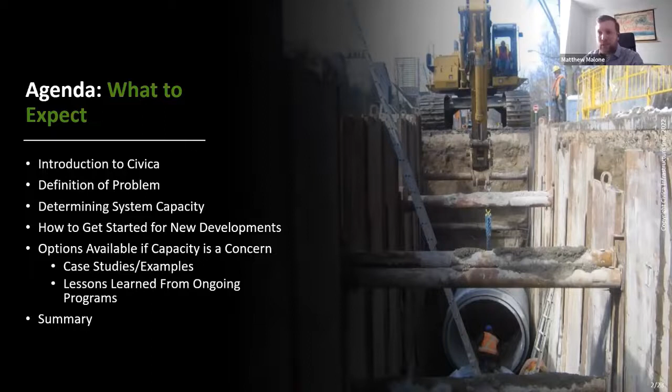So a little bit about Civica. So, Ed, who's on the call, started Civica back in 2012. And so we're going into our 10th year, and really most of our focus is on collection systems.

We do a bit of work on the water side as well, but most of our work is helping municipalities grow and manage capacity in their collection systems, whether that's stormwater or wastewater systems, through the various services that we provide, whether that be field services, going out, performing inspections of assets and flow monitoring, and looking at the system in the field, as well as the consulting side of things.

So a lot of work that we've done in the past is on the modeling side, looking at capacity. We do some water resources work as well, and everything from as small as a sub watershed or an individual asset inspection, going out and CCTVing a pipe, to larger, higher level master plans and studies. So everything from right down into the nitty gritty to those higher level studies.

I'd say Amit did a very good job introducing us, so I think I'll probably just skip this slide because I don't think we could have put it better ourselves. So I'll just dig right into the content and the reason why we're all here today.

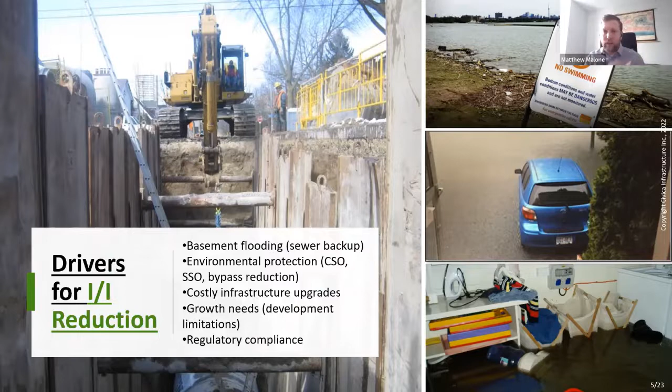And then there's certainly the regulatory compliance. So with the ministry's new CLI ECA regulations, which focus more on consolidated linear infrastructure, it's really looking at the system as a whole and how it functions together. And so that's another driver as to why you want to look at I&I on a system-wide basis.

And so, when we talk about some of the pressures we're experiencing right now, and as we continue to grow, and as we see that there's a large increase in the prices of homes and the amount of growth that's happening around Ontario, we can see that it's happening now, and it's going to continue into the future through all the growth forecasts that we've seen, and the ministry's Places to Grow guidance as well. So there's a lot of growth that's happening, and it's causing a lot of strain on existing wastewater systems.

To add to that is the climate change component; there's certainly a lot of evidence and a lot of research happening that projects larger storms into the future. So how do we accommodate both a growing population and potentially larger storms? Again, focus mostly today on the wastewater system. So how do we make sure that going forward we're able to accommodate that growth while also making our systems more resilient?

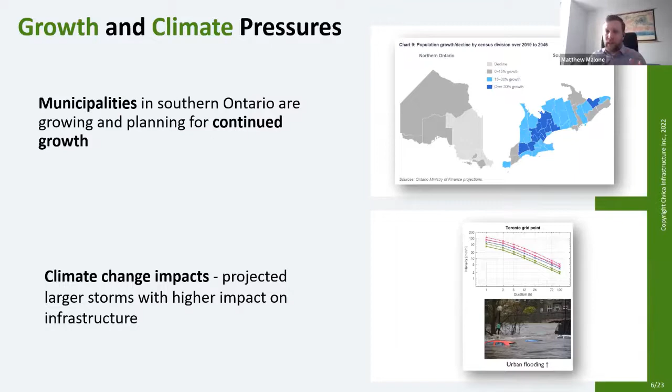This doesn't always lead to issues, but one common problem that we do see, and a lot of focus, in the City of Toronto with their basement flooding studies, is that when the I&I is too high, or wet weather flow is too high, then it does cause issues like basement flooding.

And so really, when we talk to municipalities and we're working with municipalities, there's a lot of conversation around either a lack of capacity in a lot of areas where there is sort of a known issue, or a lack of understanding of the capacity within the system.

So a lot of municipalities are still in the process of collecting that information, whether that's monitoring and modeling, to see where maybe some of those pinch points in the system are, where they may experience capacity constraints in the future. And so how do you accommodate growth in a reasonable and sort of responsible manner, if you're not really sure what the capacity is?

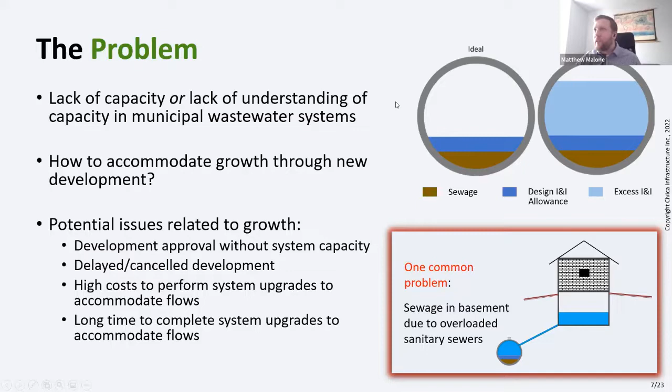So when we talk about determining the capacity of a system, a lot of the time this is something that is assessed as part of these higher level studies, whether that's a master plan or a pollution prevention control plan. And really those happen, let's say, every 5 years or every 3 or 4 years for some that do it more often. But there are tools available to be able to do that more frequently, to get an assessment of the capacity of your system without having to wait for one of these studies to be completed.

So one of our big pushes is to try and make this as live or as near real time as possible. So we have certain tools and systems in place through monitoring and modeling and reporting to municipalities on a very frequent basis, so they can get an understanding of what the capacity actually is in the system. And typically you set this up once, and then it needs to be maintained, but it's a self-perpetuating system that will give you a good understanding of what's going on at a municipality level, let's say.

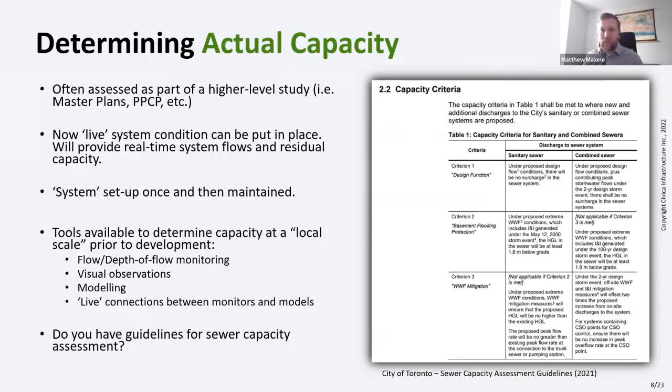So a question, and I'll get to it more towards the end, but essentially if you don't have guidelines, or if you don't have an understanding of how you would put something like this together, it's certainly something that is out there. It's widely available, and if you need help pointing to resources, feel free to reach out, and we can certainly connect you to where you may find something like that.

And so how do you get started? So typically, this is usually how we see it: in terms of growth and new development, when these subdivisions or site plans are being put together, they're then submitted to a municipality, and a capacity assessment, for example, in the City of Toronto is a requirement. So as part of putting in a new infill development or a new subdivision, a capacity assessment is automatically triggered to see if there is capacity in the downstream system to accommodate those flows.

And this is compared against what was there previously. So if it's a 2-story existing building and they're tearing it down and putting in a 20-story, we're putting in the change in flows, but also comparing it against the capacity criteria.

We've talked to a number of municipalities, and typically, when you're taking on this additional analysis, there may be a need to either create a fee to do a review of these site plans or subdivisions, or revise their existing fees so that they have the resources, whether that's to hire somebody internally to do that work, or to hire a consultant outside that can act as your sort of in-house modeling and capacity assessment team to make sure that, again, as these new subdivisions or new developments are going in, there is capacity in the downstream system.

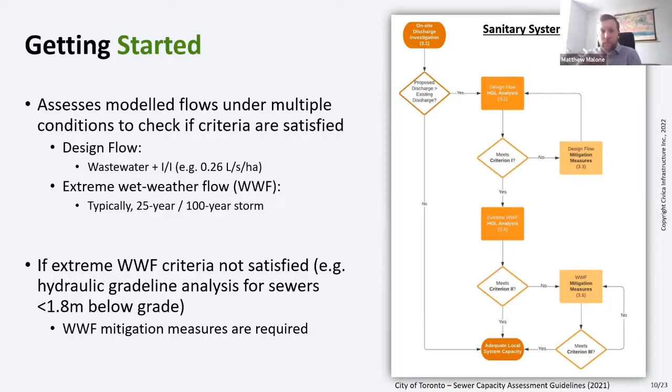And so when we talk about I&I programs, we typically run three different types of programs at Civica, but in a broader scale, this is typically how I&I is thought about. So we have the new subdivisions, I&I prevention. So as things are getting developed, trying to prevent I&I at the inception of that new development, at the inception of the new infrastructure. So really the key focus of that program is on the standards and guidelines for development and how the infrastructure is going into the ground.

We've been involved with York Region the last 5 or so years, performing flow and rainfall monitoring to see what the effects of these enhanced construction standards are on the flows in the system, to make sure that they're hitting the targets that they're looking to hit. And I have another slide on that in a second. And then some conformance reporting, making an assessment of how effective these measures are and how that's turning into, ultimately, the flows and the capacity that these new subdivisions are taking up in the wastewater system.

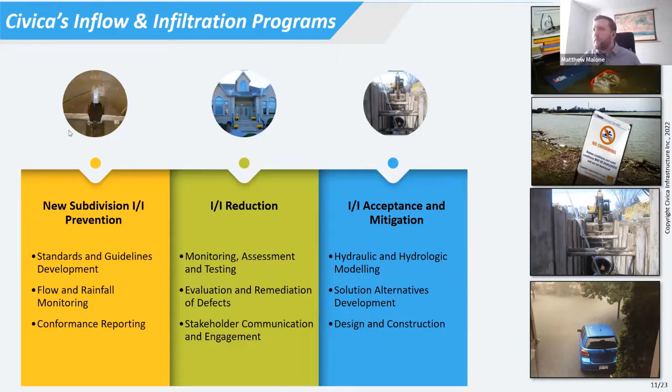And so I wanted to highlight some results that we have from some of the work that we've done in York Region with their new subdivision I&I prevention program. And the MEA, I think you were involved at one point. York Region did a presentation, I forget, maybe middle of 2021, with more background on the standards and the guidelines and some of the construction practices that were happening.

So I encourage you, if you haven't seen that webinar, I think MEA posts everything on their website, so you can go back and dig into more what they were doing on the standards and guidelines side of things. But this is more on the results of the flow and rainfall monitoring and assessing how these subdivisions were being built out to ensure that they were hitting these lower I&I levels that they set out to do as part of their new subdivision I&I prevention program.

So there's a lot going on this slide, but essentially what I wanted to highlight was that we have the region's design criteria, 0.26 liters per second per hectare, which is the design criteria for their wastewater system. The limit for this program, because they were enhancing the construction practices and trying to make it as leak-proof as possible, was to try and hit an RDII, a rainfall-derived I&I rate, of 0.12 liters per second per hectare. So basically half of their design criteria was their target for this program, so they were trying to hit these lower flows.

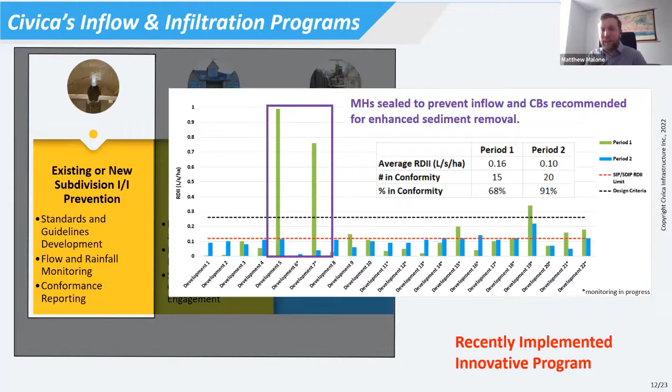I kind of wanted to highlight this as a potential option if you're a municipality and you're looking at a program where you can try to reduce I&I at the inception of this infrastructure. This is really a good place to start. I just wanted to highlight, and again, encourage you to watch the MEA webinar with York Region around the standards and guidelines. It's really the backbone of a program like this.

There's a lot of clear expectations and understanding within the guidelines as to sewer installation and performance testing that needs to happen. I believe York Region's building out their flow monitoring requirements and trying to make it as clear as possible for all of those involved that are doing the flow monitoring and reporting. So there's some good literature and good information out there if you're looking to implement some of your own programs.

I know Ed's been working with the MECP quite a bit on these new CLI ECA regulations. So I think some of the language is going into those as well, and making sure again that at the inception of this infrastructure, the I&I is at and ideally much below the design criteria.

Even if you don't have these standards and guidelines quite ready yet, it's probably worthwhile to at least monitor some of these new subdivisions if they've been in a couple of years, 5, 10 years, if you haven't done that yet, to see how that infrastructure is performing, and to inform whether you need a program like this.

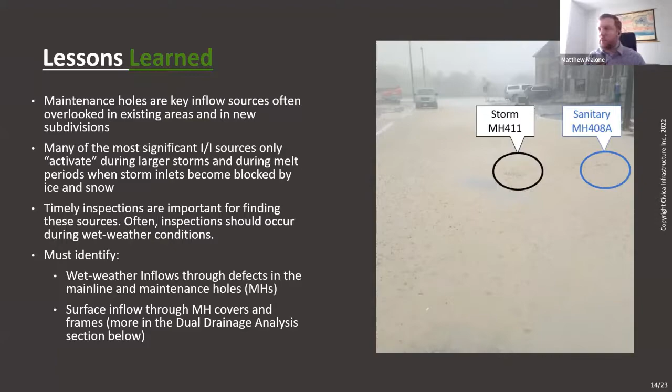Another lesson learned for us on this program is that you need a very robust data collection and management system. This is strictly for the flow monitoring side of things, but we're building out more and more tools as we go through, and we're managing I&I programs to manage even the asset inspection side of things. Every time you go out and collect a piece of information about a particular asset, this is certainly something that we want to collect and be able to show in a sort of cloud-based platform, and have the ability to create tools and ways to analyze this data to quickly convey and share with the stakeholders involved in the particular program.

So this is just a stat I pulled out this morning. Through this program alone, we collected over 10 million data points, when you're talking about rainfall data and level data and velocity data to calculate flow. So it's a very big data management and data analysis job.

And so having a platform like DataCurrent that we use, you can get sort of real-time access to the data, alarm the data, and we've implemented and integrated a lot of analytics to automatically calculate various parameters, whether that's I&I in liters per second per hectare, I&I rates and volumes and whatnot, and really trying to put it into more of a dashboard so you can quickly log in and see what's going on, again, to get that snapshot of the capacity in your system.

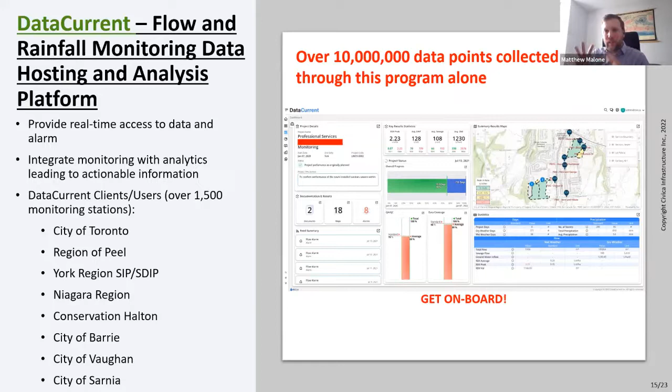The second innovative program I wanted to talk about was the developer-led I&I reduction program. This is a program that I know Ed was one of the key directors and technical advisors at the start of. And this is a program we've been working on in York Region for at least 10 years, and we're starting to permeate into more municipalities across Ontario.

But essentially, through this program, we've been able to accommodate over 30,000 people worth of flow through I&I reduction activities. So lots of treatment cost savings and a lot of ability to then take development charges, over 200 million in this particular case, 95 of that directly contributed to the wastewater component of the development charges that are obtained by York Region.

So that's just a high level intro to the program, but what is a developer-led I&I reduction program? This is a program where the developer investigates, identifies, and remediates I&I in existing areas in exchange for sanitary servicing capacity in the existing system. The reductions are typically targeted in the areas around that development or downstream from that development, and that will offset the flows that the new developments are going to put into the system.

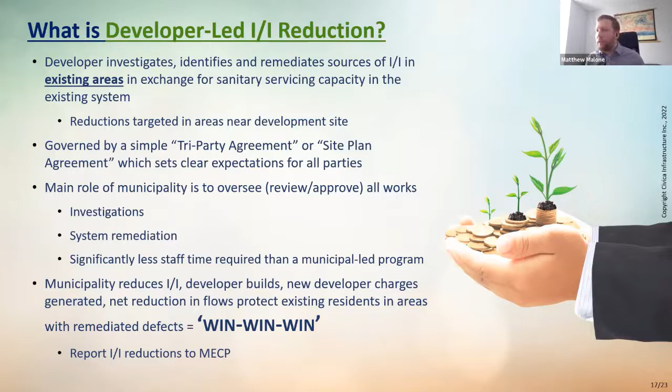But at the end of the day, we see it as a win-win-win. The municipality gets to reduce I&I, the developments are allowed to proceed, these development charges are generated, and in existing areas, we've gone onto public property and private property and fixed defects on both. So we see it as a pretty big benefit to all parties involved. York Region's currently using that as part of their reporting of I&I reductions to the MECP as well. So just another added benefit of the program, and really, we see this as another tool in the toolbox.

We've done a ton of this work in York Region. These developer-led initiatives account for about 20% of their overall reduction as part of their I&I reduction mandate by the MECP as a condition of approval for the Southeast Collector Sewer. Their goal is to reduce 40 million liters per day by 2031, and these developer-led initiatives have been responsible for almost 20% of the reductions they've seen to date. So it's still going to continue for at least the next 10 years.

And it really supplements municipal-led programs and projects that a lot of municipalities are already doing, including specific I&I projects, but also state of good repair programs, so your regular CCTV and asset inspection programs, and then other studies and master plans that may target and have some sort of operation and maintenance or I&I component to them.

And so one of the best and biggest benefits, I guess, to this type of a program is what we call a net benefit component. So typically the way that we've structured and York Region has structured, and it varies municipality to municipality as to exactly what ratio is used, but essentially what happens as part of these programs is that the developer has to reduce at least twice as much flow as they're putting back into the system.

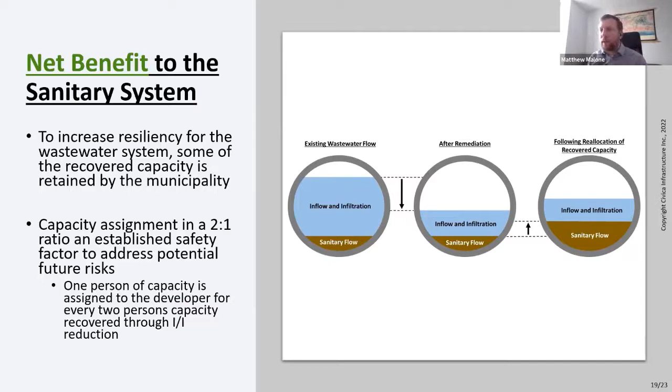And so it builds in a little bit of a factor of safety, but also it allows the municipality to generate extra capacity that they could use for other priority projects, whether that's intensification or affordable housing or anything like that the municipality is looking to get some extra capacity for.

And so some highlights of the program, and I already mentioned this a little bit, but we've done a number of projects in the past to free up capacity for this growth in a timely fashion, and ultimately to try and reduce the amount of new pumping stations and treatment plants.

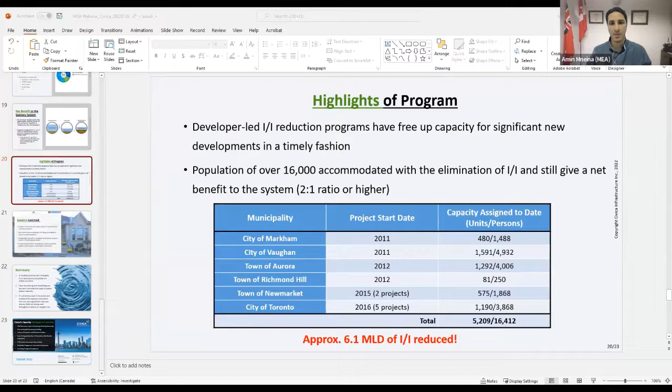All right, apologies again, everyone. I can assure you that the problem has been resolved completely now. Okay, I will. I'll try. I only have a couple slides, so I'll just try and wrap up quickly, and then if there's any questions, I'll try and leave some more time.

So yeah, essentially the goal of this slide was just to kind of show the amount of growth that can be accommodated through a program like a developer-led I&I reduction program. So over 16,000 that we've been able to do, and this is actually a little outdated, so I need to update the number a bit, but you get a sense of what's going on. And so this is after that 2-to-1 or higher ratio. So over 30,000 actually accommodated through a program like this.

A lot of the risk for doing remediation work on private property, which is a big challenge for a lot of municipalities, is transferred to the private proponent as part of these works, which is a big benefit that a lot of municipalities like from a program like this.